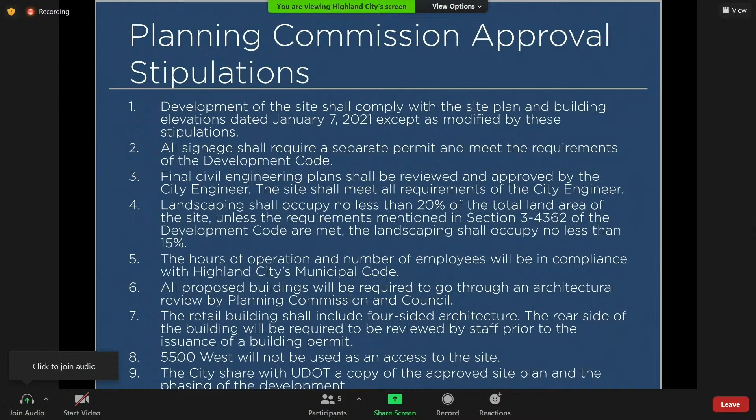This is the site plan. There are 5 buildings, over 9.64 acres, and this totals out to be 124,500 square feet of commercial, which is a significant increase from the original site plan back in 2007.

They totaled 524 parking stalls, and after it was calculated with the square footage they have, we require 498, so they exceeded it. The accesses are 2 on Timpanogos Highway and 2 along Alpine Highway, all existing accesses between those buildings.

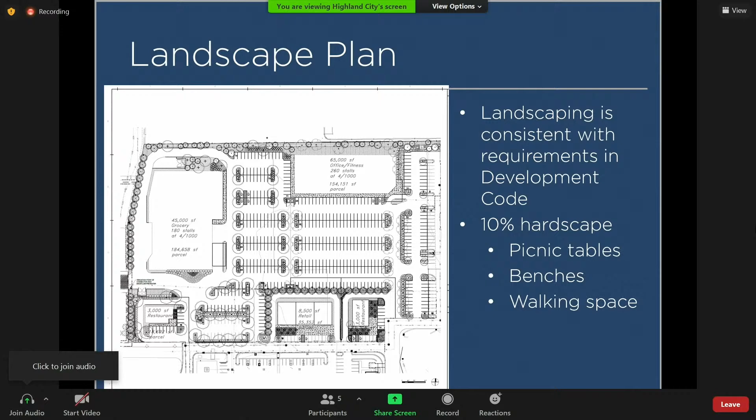This is the landscape plan. They have met the requirements of the development code, and added a few hardscape features including picnic tables, benches, and walking space.

And this is their architectural plan. The building height is 32 feet and 8 inches. The development code has a maximum of 45 feet for the CR zone. The materials and colors are consistent with the architectural design standards for the CR zone as well.

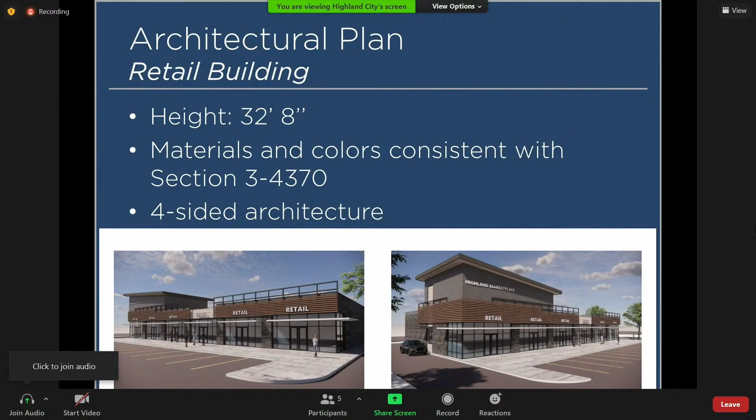They also included 4-sided architecture, which was a comment made by staff, and they updated that very quickly. Those are the elevations, so you can see what it looks like from each side.

For citizen participation, appropriate notices were sent for the Planning Commission and City Council meetings. This doesn't require a public hearing, and we have received no written correspondence.

As staff, we recommend that the City Council approve the site plan and architectural plan of the retail building, subject to the 9 stipulations recommended by the Planning Commission. The applicants are here if you have any questions for them or for staff.

Okay, council, you have questions? I know Kurt said he did, so you may as well come up. Yeah, and I have questions too, Mayor. Okay, go ahead. Rock, paper, scissors, you go first. We're nice to each other now, we sit by each other, so that's good. However, I got a bigger desk, but anyhow. So I'm the stepchild in the corner, because I'm the senior, I guess, here.

But my big concern is the intersection at Timpanogos Highway and Alpine Highway, probably one of the busiest intersections in the state. When we had UDOT look at it 2 or 3 years ago, it was a failing intersection, like an E grade or something on the list. I'm delighted you're going to develop this area, but do you think these 4 access routes provide adequate access to these businesses? This is a question for our city engineer too. Is there anything we need to do as a city to maybe improve that?

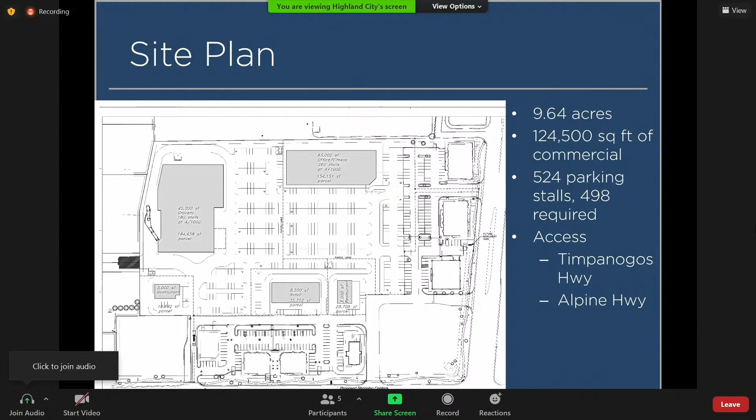You've got them all coming, you know, because we have there by the dry cleaner. Can you go back, Kelly, to their site plan? So we've expressed these concerns to the developer, Kurt, and if you look at their access on that very southwest corner, that will be a straight through into the development. And then we will actually put stop signs, so that you no longer have people trying to come straight through. They will actually stop before, right where you're at. And we've talked to the developer about painting all of that red so we don't have the parking issue. So that's one of the access points we have some serious issues with, and we're working through those issues.

Have we talked to Quick Quack, so as they come out of the tunnel, they can't come out? If they turn left, they go to their vacuums, and I think that would cause queuing, which would push it a little bit out, and then you can still get on. I always get nervous when I'm in that tunnel. I come out and I go, am I going to get hit as I come out? But if I turned left, I'm worried about those cars, I've been backed up there, and going, is that car going to hit me? I can't turn. It's just trying to help your whole flow there.

So I wish I was in the position of being able to pressure Quick Quack. I'm not sure they'll listen to me much, but...

So, Kurt, this may be more appropriate for a future meeting when we get more details, but glad you raised the concerns, and glad staff is already working on it, so I think that's a positive. Any other comments or questions? Okay, thank you. Thank you.

So, council, further discussion or motion? I'll make a motion. I move that the city council accept the findings and approve the site plan for Highland Marketplace Phase 2 and architectural plans for the retail building, subject to the 9 stipulations recommended by the Planning Commission. Is there a second? I'll second it. Motion by Kim, second by Scott.

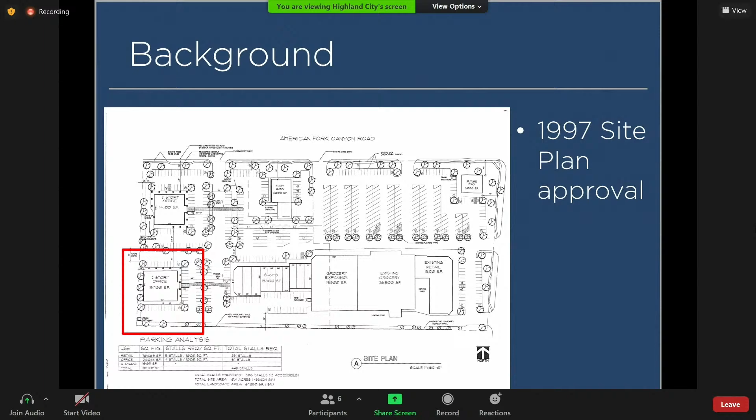This was brought before the Planning Commission on January 26th. They had the responsibility to do the architectural approval, and there was also a request for a building height increase to 34 feet 6 inches. The maximum for the C1 zone is 30 feet, but the code states that the Planning Commission has the ability to approve it up to 36 feet. Overall, the commission did recommend approval of the site plan, and they did approve the architectural plan, and also approved the request for the 34 feet 6 inches.

This is the site plan. The lot is 0.984 acres, and the building is 14,882 square feet. It is 2 stories, so it's got a 7,442 square foot building footprint, my goodness. They have 60 parking stalls, which is exactly what's required by our development code. And their accesses come from the 2 from Town Center Boulevard, and then there are the existing accesses throughout the rest of Lone Peak Village that connect to their parking lots.

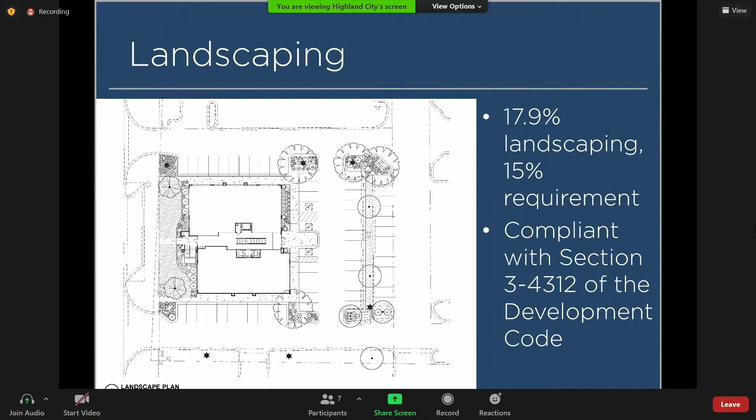This is the landscaping plan. They exceeded the landscaping requirement by 2.9%, and everything about it is compliant with the landscaping section of the development code for the C1 zone.

Like I mentioned before, this was the architectural review done by the Planning Commission. They approved it based on findings that the colors and materials were consistent with the architectural design standards in the C1 zone, as well as the fact that it had 4-sided architecture, and they approved the request for the height increase.

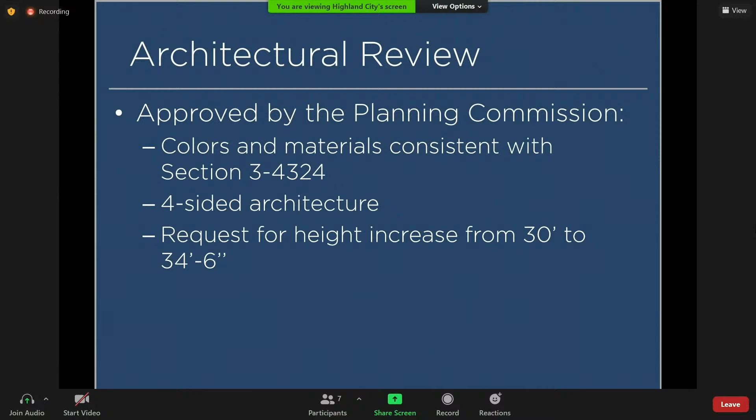The citizen participation appropriate notices were sent out for the Planning Commission and city council meetings, and we have received no written correspondences on the matter.

This is our recommendation as staff, that the city council approve the site plan and landscape plan. It's inclusive, subject to the following stipulations, which are all very standard. I'm happy to answer any questions.

I'm not sure if the developer's on Zoom. It's Daniel Schmidt or Thomas... Oh my goodness, you're here. So he's here if you have any questions for him directly. So, council, do you have questions? We can just ask you to come up to the podium and make it easy.

So if you'll state your name. Just Daniel Schmidt, I'm with WPI, the developer.

So Kelly, can you bring back up the site plan, please? Directly on the south of that site plan, I know there's a road that goes through on that south side, and it looks like we have parking that is backing onto that road. Now, that road is not a city road from what I understand. Is that the private? Correct. So because it's a private road, they're able to back into that private road. Is that correct?

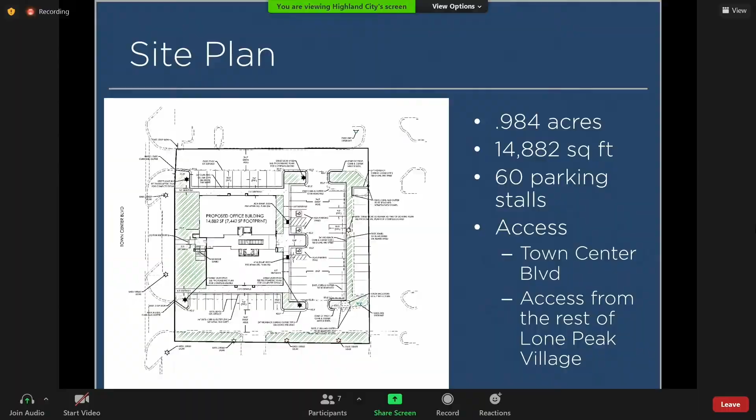They're able to back into, as in? Because if they park in, they're going to be backing out into that little roadway on the south side of their building, and also on their north. Right. Mike, did you look at that? So yes, that is perfectly okay, according to Mike.

So are you finished? I've got a question. I assume you're the owners of the building in front, is that correct? Correct. And do we anticipate similar office use? Will there be any retail, or mainly just office? Yeah, we are anticipating mostly office. And when I say mostly office, there's now much of a crossover between some of the retail uses and some of the office uses, like some service medical. Yes, but just office, we're not planning on retail.

And do you feel like you have enough access? We've been talking about that. Yeah, access isn't a problem. The drive, like your previous question or concern, we view it much like a shopping center's interior roads or accesses, where you have storefront parking backing out into the drive aisles. We see that, but overall, access is fine.

So is there a name to this architectural style? I mean, it's very kind of modern. It's a little different than what else we have in the city.

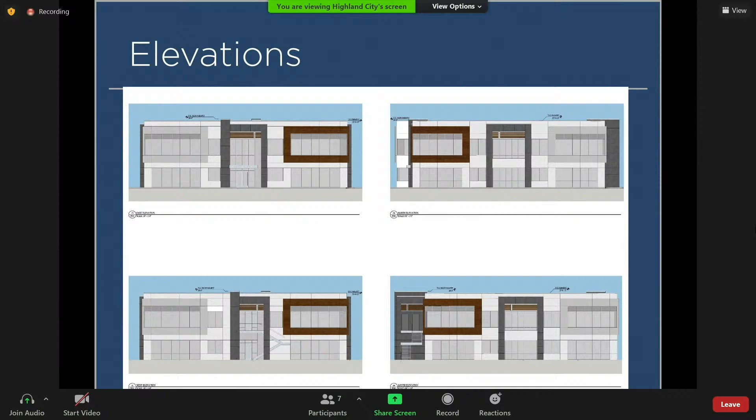The original building remodel was really thought through carefully, predominantly because it had that mansard roof styling, which was very difficult to work around on a remodel. Working within the city codes, as well as the desire for a more contemporary or modern slant coming into the marketplace today, the architects were trying to find a good balance between the raw materials used in a lot of Highland architecture, as well as cross-pollinating. The original remodel of the first building was thought through carefully in relationship to how it will affect this building, and in time the remainder of the center will be remodeled also.

So do you own the rest of the center as well? Yes, the Lone Peak Village Shopping Center is also the same group. And you're talking about remodeling that? Yes, at some point in the future.

You know, at one time I went and talked to WPI. Do you guys have, at that time, pre-COVID, one user looking for an office building? Is that still the thought process, that you might have one user take the whole building, or has that changed?

That's kind of changed. We're in discussions for about 65% of the space right now, and we feel very solid on 50% of that space being pre-leased. We think that's going to increase as the vertical comes out of the ground.

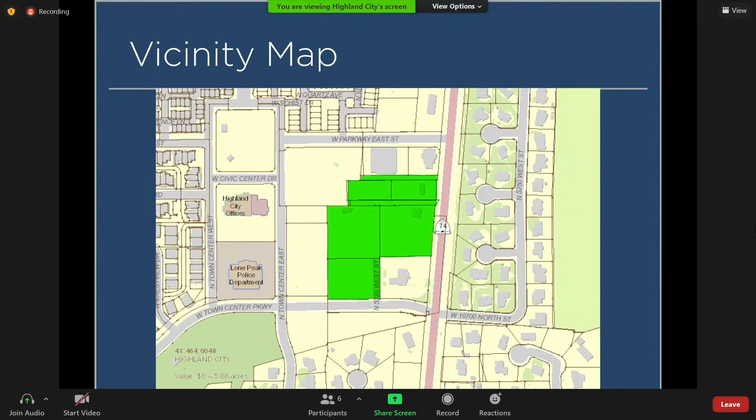This is a vicinity map, just east of where we're at right now. A little background: this was approved as a PD district with 42 residential units and 23,000 square feet of commercial space, at the August 4th, 2020 City Council meeting. Just a refresher, the preliminary plat process is not discretionary, meaning the property owner is entitled to the approvals attached to the PD district from August 4th.

When this was presented to the Planning Commission, they held their public hearing on January 26th, which we do not hold here. The commission recommended approval of the preliminary plat with the stipulations recommended by staff. After the meeting, staff went back and looked at the PD district approval and edited stipulation 4 a little bit, just to clarify that there are 3 parking stalls per residential unit.

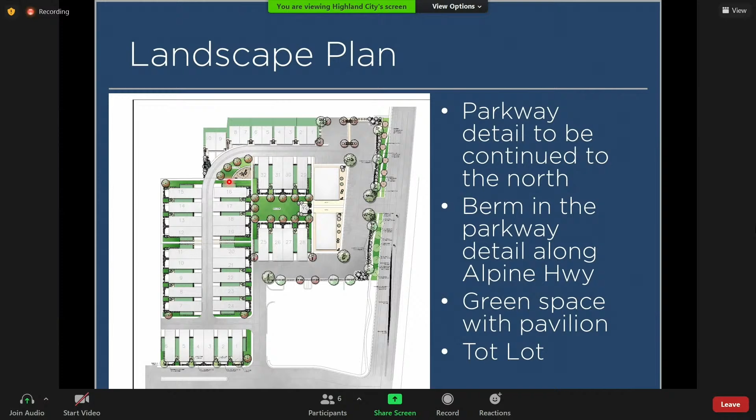We held the DRC on January 6th, which now is not required anymore, as we had that text amendment a couple of council meetings ago. The appropriate noticing for the meeting was done as a public hearing, and then the notices were sent out for Planning Commission and City Council, just posted as required by our code. And we have received no written correspondences.

We as staff recommend that the City Council accept the findings and approve the preliminary plat subject to these, that should say, 3 stipulations recommended by the Planning Commission, and then stipulation 4 revised and as recommended by staff.

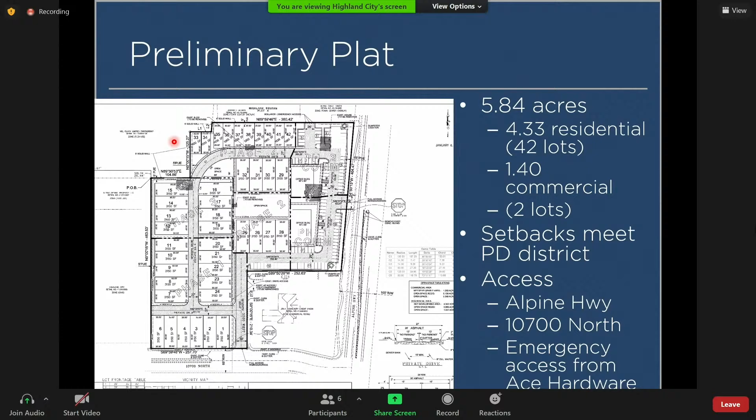Yeah, these shapes just show the lots, they don't show the actual buildings, but they have 2 garage spots, and then they have a concrete pad on the side of the home that is the visitor parking stall. So they will be parking off the street? Yes, theoretically. That was what was originally approved in the PD district, so we're just enforcing that, and I believe that was in the plans that's in the staff report as an attachment, if you wanted a little bit better of a visual than seeing these lot shapes.

So Kelly, you already pointed this out, so the 10 parking spots by the bollard, those will be improved when they improve phase 4, correct? Yes, of the residential, yes.

Now also, they gave detail on the play set. Did they give any detail on their pavilion? When we were kind of looking at all this, they had some really neat drawings on pavilions. Are they still planning to do the same pavilion style that they presented? So I do remember from reading through the stipulations and approvals of the PD district that the architectural colors, all the plans for the pavilion, would be presented to the council before it was built. So that will go before y'all before it's done.

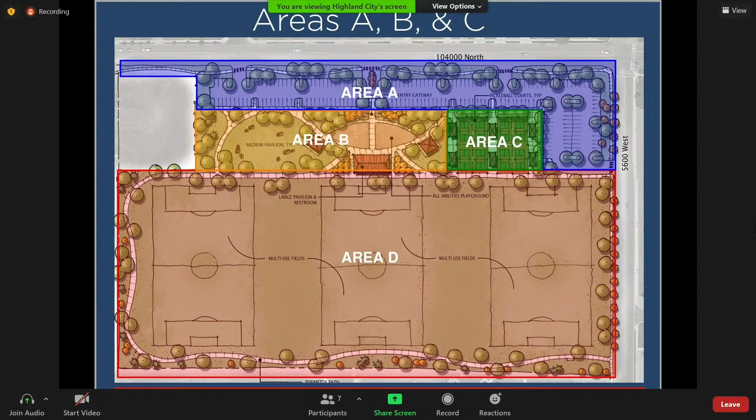Staff took all the information that we had at this point, and we tried to come up with a phase 1 recommendation that we could afford within our current budget. So what that ended up being is, you have 2 documents in front of you. It's titled phase 1, and there's no red on it. So that's the document we're proposing.

What that includes is all of the 10400 North improvements, a parking lot, but a very small section of it, about a third of the size of what the park will eventually need, just in front of the amenities we're focused on: the first phase of an all-abilities playground, 4 pickleball courts, and a restroom, but it would be separate from a pavilion. So it would still be a restroom in the main area, but not the pavilion combo we had originally envisioned.

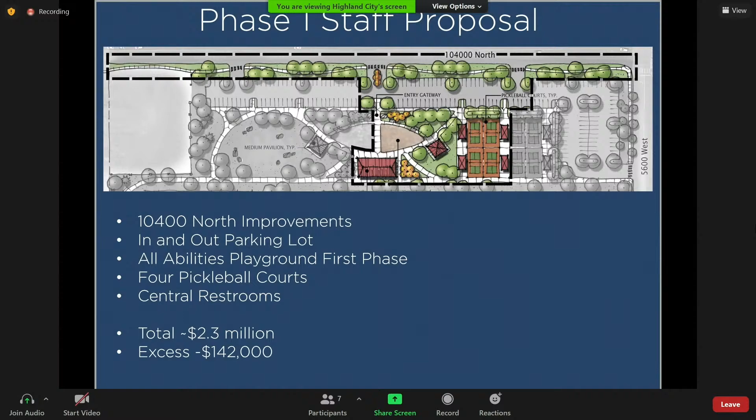Our estimated cost for this would be $2.3 million, which gives us a little bit of wiggle room, about $142,000, should prices change. At this point, are there any questions about our proposal for phase 1?

What makes it so expensive? Mainly, it's the fact that this is completely raw ground. We are spending a good chunk of the money just doing the site improvements for 10400 North, and all of the site improvements that have to be done to bring utilities and get the grading proper and get this site ready to actually put a park on it.

So this is 5 times what Spring Creek cost, basically. Is that just because you got to put in the infrastructure and the road? The infrastructure and the road, it's just so enormously expensive. Unfortunately, a good chunk of our money is going towards that, not the pretty amenities we want to see in a park.

It includes piping the canal, right? Correct, so that's kind of expensive. You mean the ditch along there, the canal? Yeah, piping the ditch. There's a ditch there on 10400 that would need to get piped.

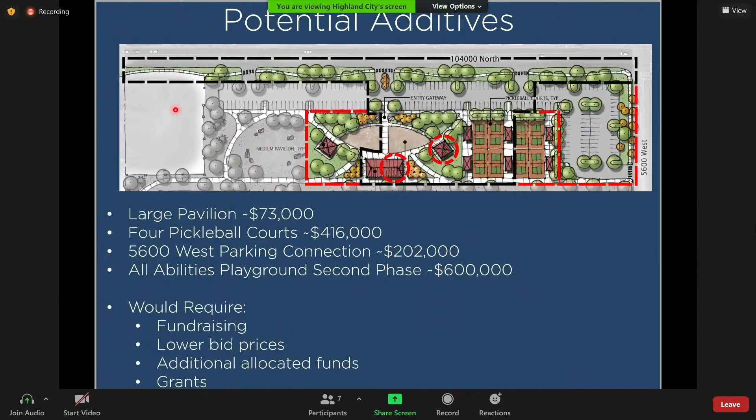Yeah, absolutely. So council, what she's looking for in the next week or two is, you just saw this plan now, so I don't think we can fully think through it, but looking at it, they'll email you the drawings and the cost information, and then if you'll reach out to staff with comments, questions, prioritizations, why this, why that, we can resolve those or get them more formal, so when it comes to a meeting where we make a decision, you have what you need. So you'll want to let her know what it is you need on this, what can we do going forward, and then we'll have a more complete thing to look at.

But this is, I think, a good start, and I appreciate getting the sticker shock now instead of later, and making it conservative so that maybe we can do more than we think, but at least knowing kind of this is going to cost a little bit.

Now, can I ask Rob a question?

The question I have is, if we went out to bid right now, when's the best time to try to get something to bid? Is it in the fall, where guys are trying to fill up their jobs for the next summer? Is it better to get it bid here in spring? Is there a time where you see cost differences, or does it not matter when you go to bid?